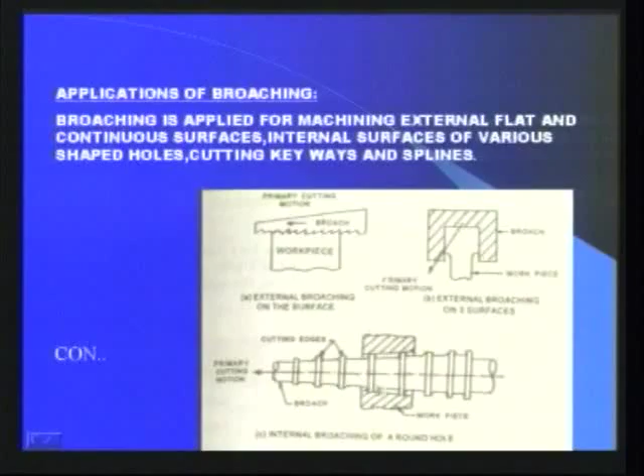These are some of the applications of broaching: it is surface broaching, it is external broaching of two surfaces, it is internal broaching of a round hole, it is broaching of keyway, it is internal broaching of splines.

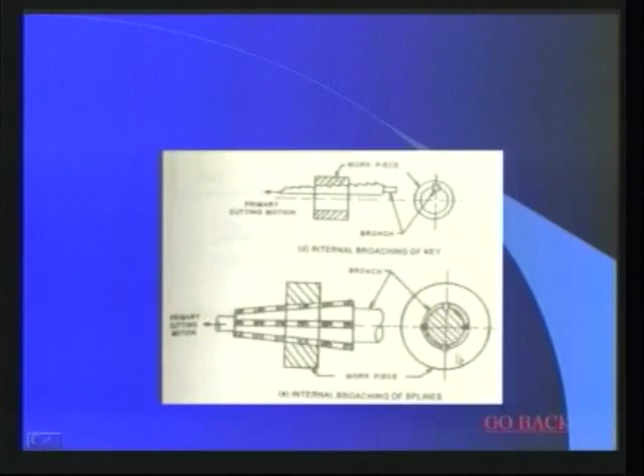Now we discuss the advantages of broaching machines and broaching operation compared with other machining processes. Broaching is faster than other machining operations as it is a one pass operation. So the rate of production is more, as it passes one time through the work for completing it.

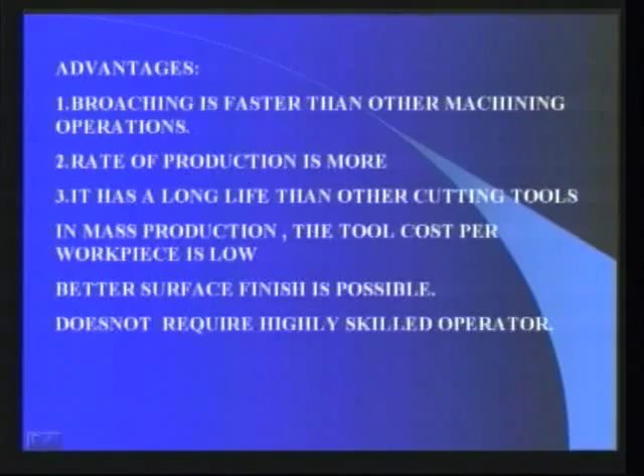It has a longer life than other cutting tools. In mass production, the tool cost per workpiece is low. Better surface finish is possible, and it does not require a highly skilled operator, as the feed and cutting speed are inbuilt in the tool.

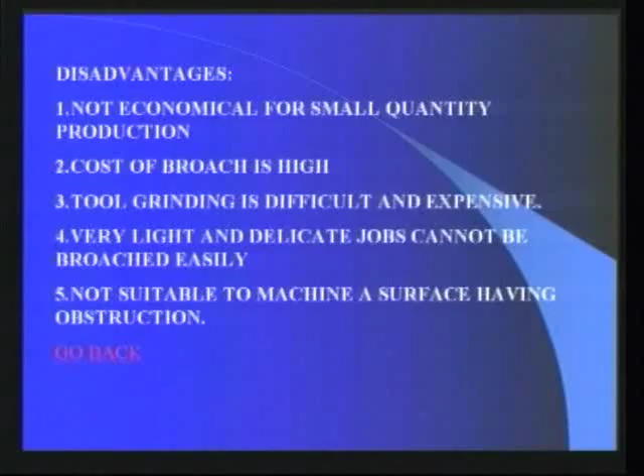The following are the disadvantages of broaching. It is not economical for small quantity production because the cost of the broach is high. Tool grinding is difficult and expensive because every tooth on the broach has its own dimensions. Very light and delicate jobs cannot be broached easily. It is not suitable to machine a surface having an obstruction.

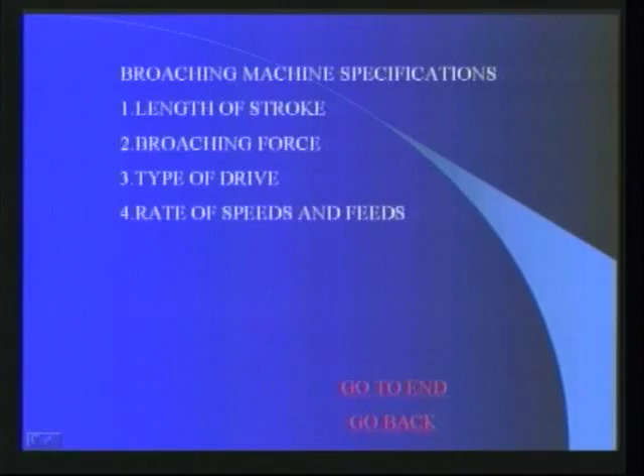Now we discuss the specifications of a broaching machine. To select a broaching machine, the following specifications need to be known: first, length of stroke; second, broaching force; type of drive; and rate of speeds and feeds.

So far, under the heading of broaching, we have discussed the definition of broaching and principle of broaching, and next we classified various broaching operations, and described various teeth on the broach tool, its nomenclature, and classification of various broaches. Next we discussed broaching materials and various types of broaching machines and their working principle, and next various applications like keyway cutting, surface broaching, spline broaching, and hole broaching, and we discussed advantages and disadvantages of broaching compared to other machining operations.

And finally, we have discussed what specifications are required to select a broaching machine.

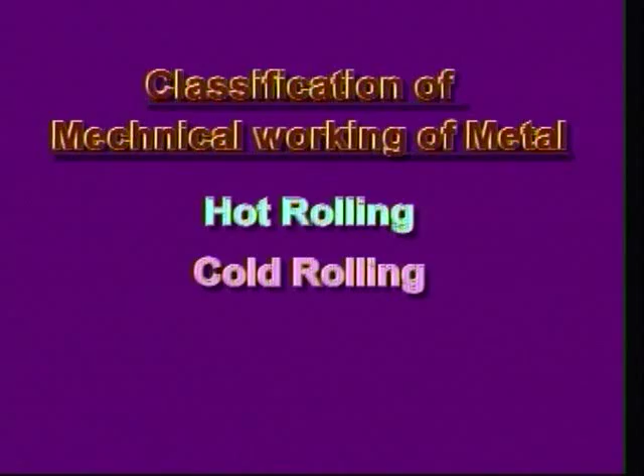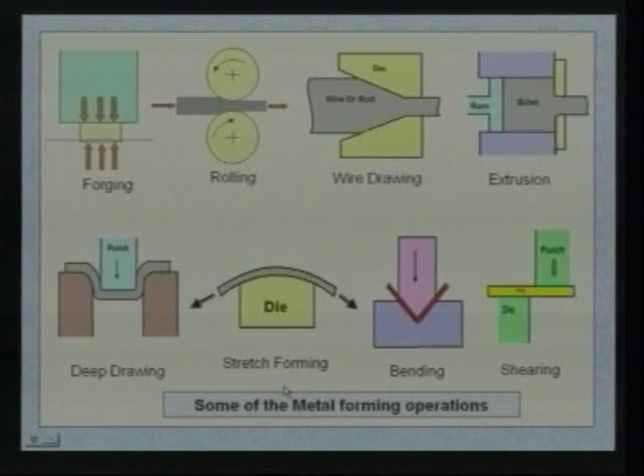Metal forming can be defined as the process in which desired size and shape are obtained through plastic deformation of materials, and the type of loading may be tensile, compressive, bending, shearing, or a combination of these.

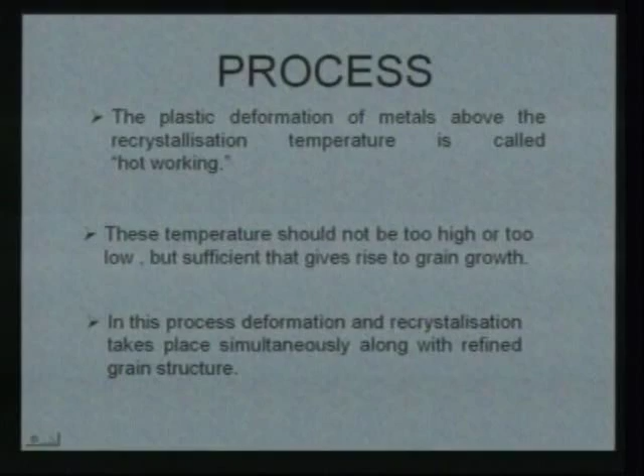Hot working: the plastic deformation of metal above recrystallization temperature is called hot working. The temperature is not too high or too low, but it is sufficient to give rise to new grain growth. In this process, the deformation and recrystallization take place simultaneously along with a refined uniform new grain structure.

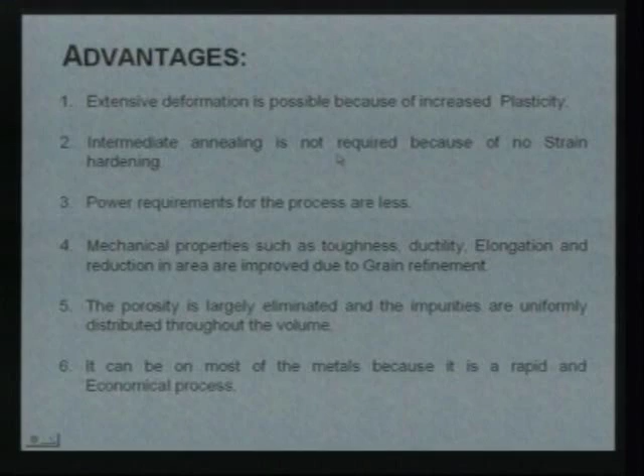Advantages and disadvantages. Advantages: in this process, deformation is extensively possible because of increased plasticity. Second, intermediate annealing is not required because of no strain hardening. Third, power requirement for the process is less. Fourth, mechanical properties such as toughness, ductility, elongation and reduction in area are improved due to grain refinement.

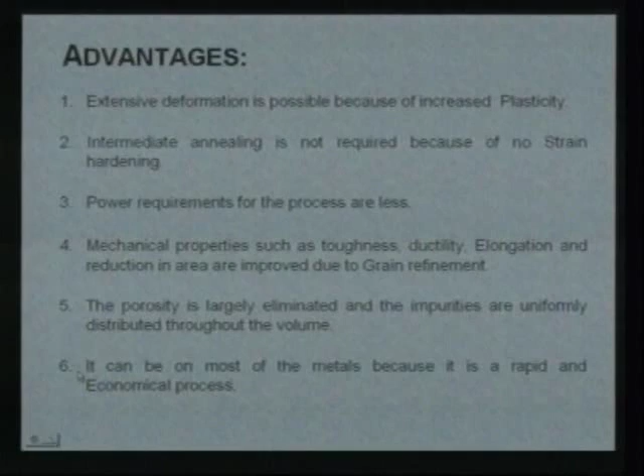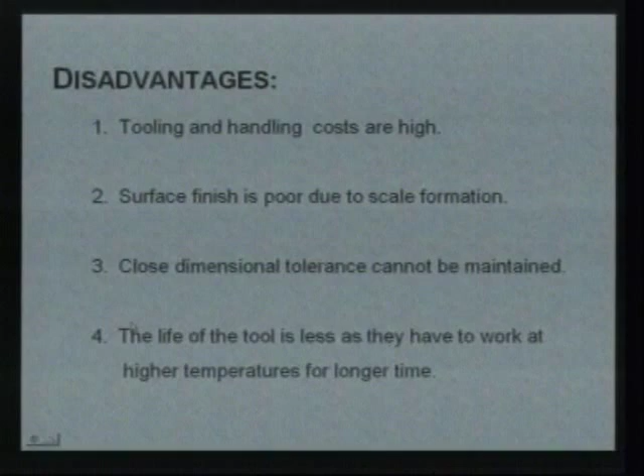Fifth, porosity is largely eliminated and impurities are distributed uniformly. Sixth, it can be used on most metals because it is a rapid and economical process. Disadvantages: tooling and handling costs are high. Second, surface finish is poor due to scale formation. Third, close dimensional tolerances cannot be maintained due to the heating of working conditions. Fourth, the life of the tool is less as they have to work at higher temperatures for longer time.

The process below recrystallization temperature is called cold working, and it is carried out at room temperature. Cold working should be followed by annealing to relieve internal stresses and to increase ductility, and at the same time the process increases yield strength, tensile strength and hardness.

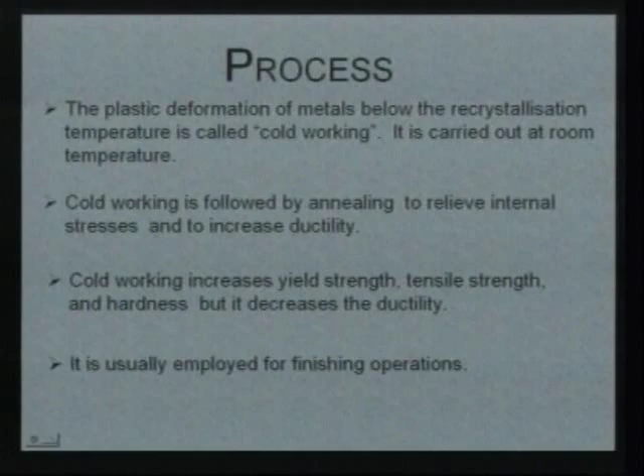Hot working processes are followed by cold working processes for a good surface finish. Advantages: surface finish is improved, and close tolerances can be maintained.

Friction increases the workload and thus more force and energy is required for the process. No surface oxidation or scaling results. Strength and hardness are increased.

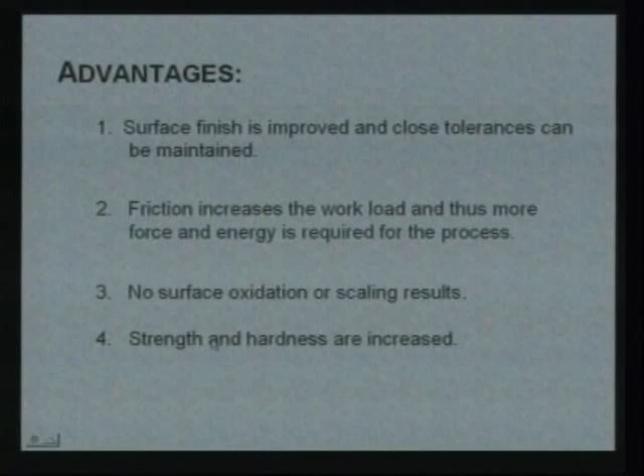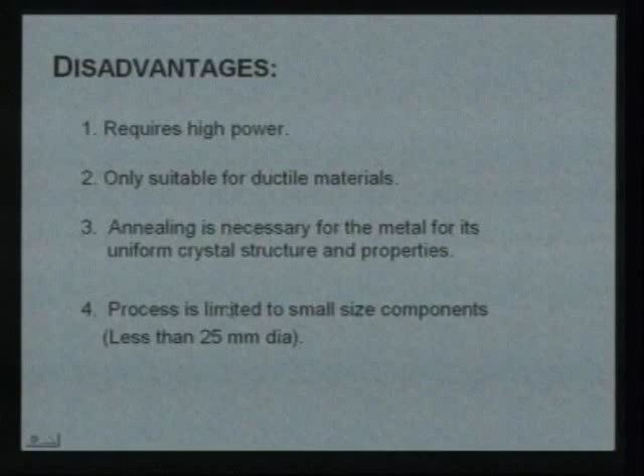Disadvantages: it requires high power. It is suitable for only ductile materials. Annealing is necessary for the metal for its uniform crystal structure and properties, and the process is limited to small size components, that is less than 25 mm diameter.

Hot working versus cold working. Now we will discuss the differences between hot working and cold working. The main difference is, in hot working the process is carried out above recrystallization temperature, and in cold working the process is carried out below recrystallization temperature.

Deformation is much more in hot working and deformation is less in cold working. Annealing is not required due to the new grain refinement, and in cold working annealing is required due to strain hardening.

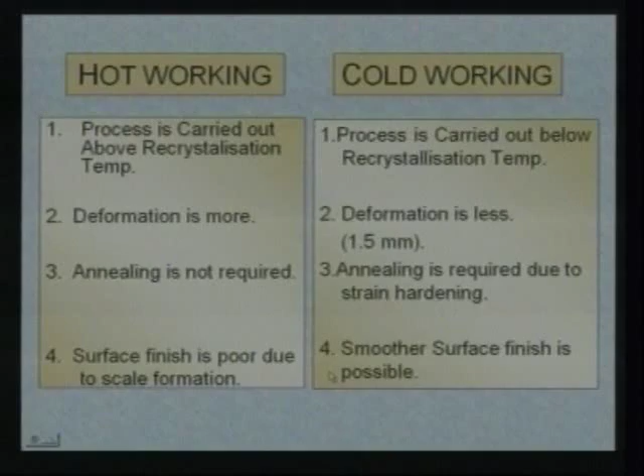Surface finish is poor in hot working due to the scale formation, while in cold working a smoother surface finish is possible. Mechanical properties are improved due to uniform grain refinement. Strength and hardness are increased and ductility is lowered.

Tooling cost is high in hot working, tooling cost is low in cold working. Power requirement for the process is less in hot working, power requirement for the process is more in cold working. Close dimensional tolerances cannot be maintained in hot working, while close dimensional tolerances can be maintained in cold working.

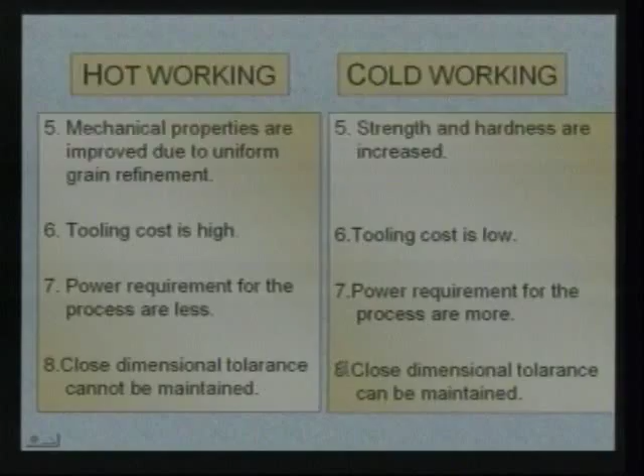Now we will discuss some of the hot working and cold working processes. Hot working: number 1 hot rolling, number 2 hot extrusion, number 3 hot forging, number 4 hot piercing, number 5 hot reeling, number 6 hot spinning, number 7 hot drawing.

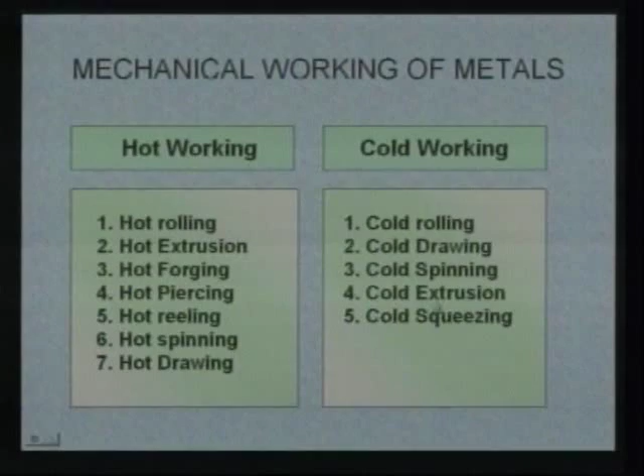In cold working: number 1 cold rolling, number 2 cold drawing, number 3 cold spinning, number 4 cold extrusion, number 5 cold squeezing.

Hot rolling. Hot rolling comes under the category of hot working process. It is the most efficient method of reducing cross sectional area of larger sections to smaller sections. It is mainly used in hot rolling mills. Material produced is used mainly in construction of structural work.

The plastic deformation of metal takes place as it passes through a pair of rolls rotating in opposite directions. The deformation is due to squeezing action of rolls. Its cross section is reduced with an increase in its length.

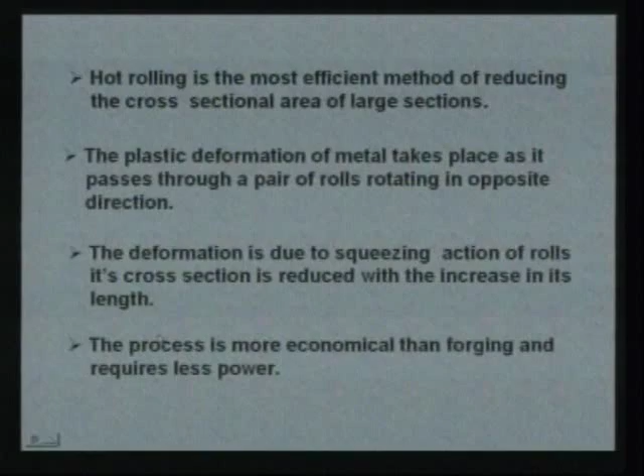The process is more economical than forging and requires less power. Rolls are made of cast iron or steel and are mounted on cast iron housing. The metal is processed several times in the rolling mills to get the required shape and size of the metal.

It is used to produce bars, plates, sheets and other structural sections like I-beam, channel section, L section, T section, etc., of different cross sections.

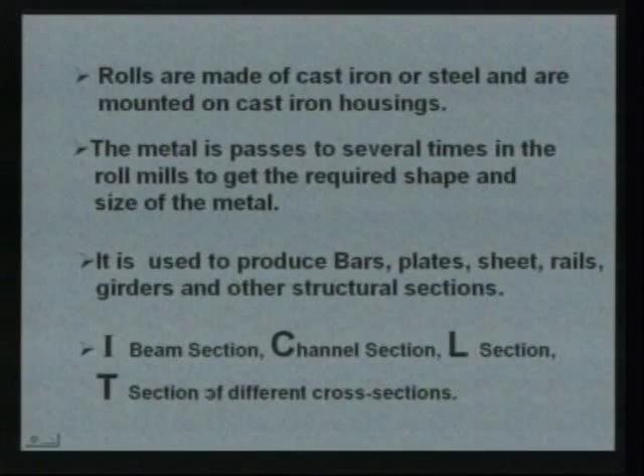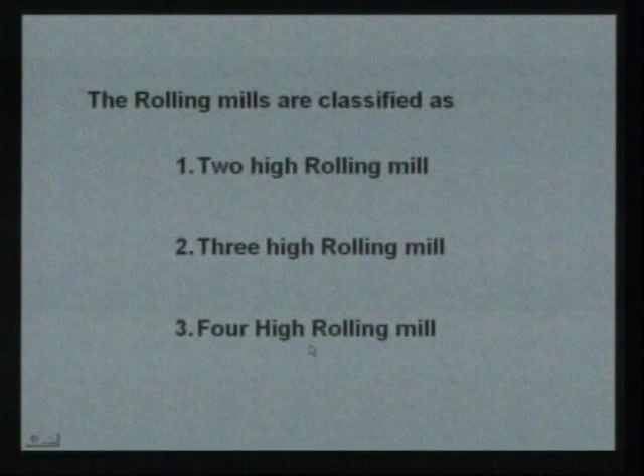The rolling mills are classified as: number 1, 2-high rolling mill, second 3-high rolling mill, and third 4-high rolling mill. In 2-high rolling mills, the figure shows 2 rolls rotating in opposite directions at the same speed, and these rolls are provided grooves of different cross sections.

The direction of flow of material is like this, or these rollers can also be reversed, and it takes several passes to reduce the cross section.

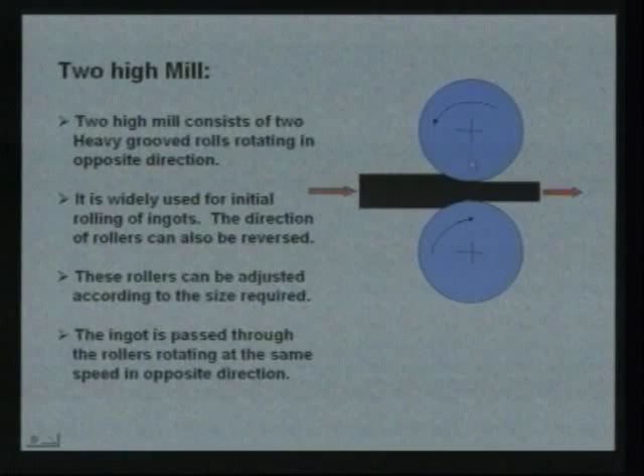The cross section is reduced like this, with the 2 rollers rotating in opposite directions. This roller is rotating in this direction and this roller is rotating in the opposite direction. Now the rod is fed towards the rollers.

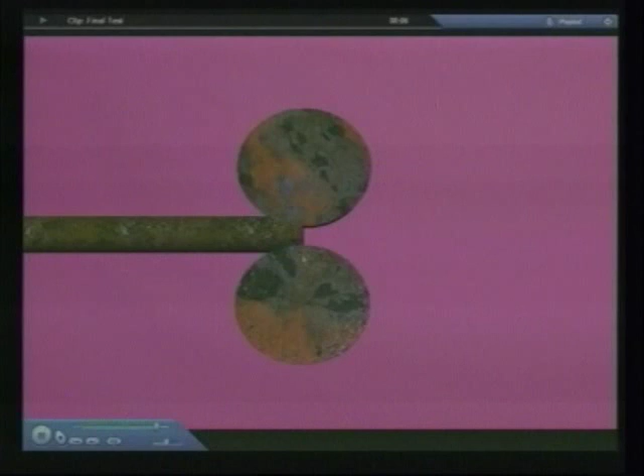As and when the diameter decreases, it squeezes and the reduced cross section rod comes out in the other direction. Now this is the original cross section and this is the reduced cross section of the same rod.

And next is 3-high mills. A 3-high mill consists of 3 rollers; with the help of these 3 rollers we can pass the material twice, as shown in the figure.

It is arranged one on the other, with the top roller and the bottom roller rotating in the same direction, and the middle roller rotating in the opposite direction. The material is rolled between the middle roller and the bottom roller in one direction, and between the top roller and middle roller in another direction.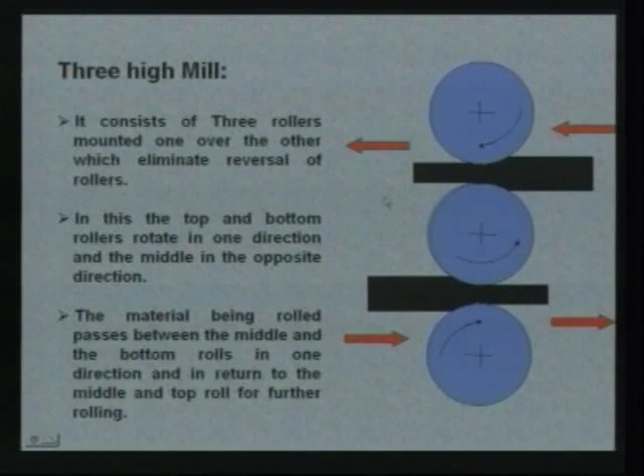And this is the 3-roll mill: this is the first roll, second roll, third roll. You see in this figure, these rollers are rotating in the same direction, this one and the top one, and the middle one is rotating in the opposite direction.

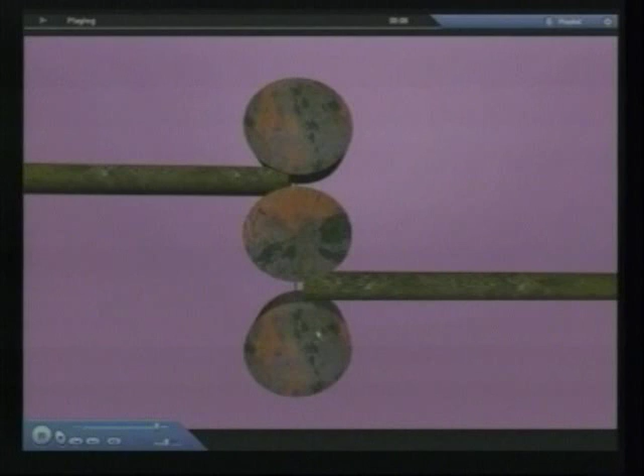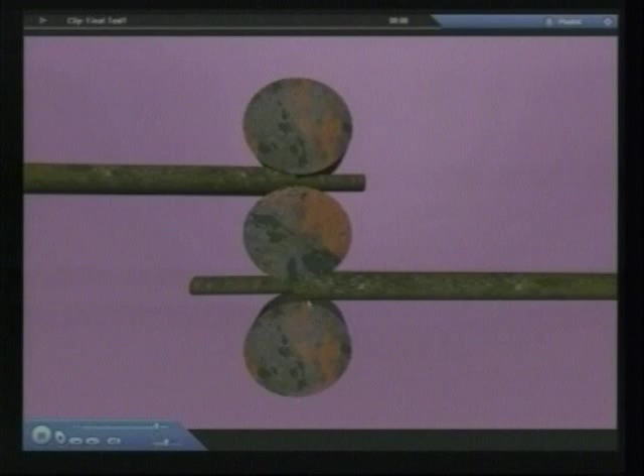Now the 2 rods are fed towards the 2 rollers at the same time, and the reduction in area, that is the reduced cross section, comes out at the end of the 2 rollers.

And next is 4 high mills. Due to the high elevated working temperatures, these rollers are going to be broken frequently. To avoid the rolling cost, we are provided small working rollers, that is C and D rollers, supported by 2 backup rollers, and this mill is mainly used to produce sheets of same cross sectional area.

That is, here also the direction is the same, and because of the backup working rollers, we can easily change the working rollers as and when it requires without changing the backup rollers.

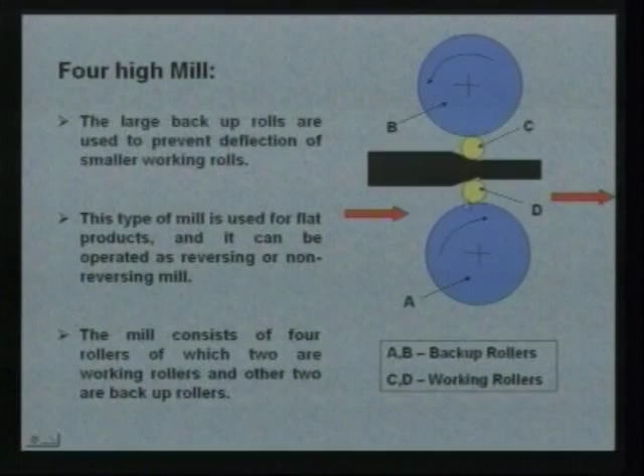That is, if you want a round section, the cross section is round, and if you want square, square. It generally took 10 passes for a big square billet of size 100 into 100 square of 1 meter length to become small round bars or square bars in regular rolling mills. These materials are mainly used as construction materials in building construction.

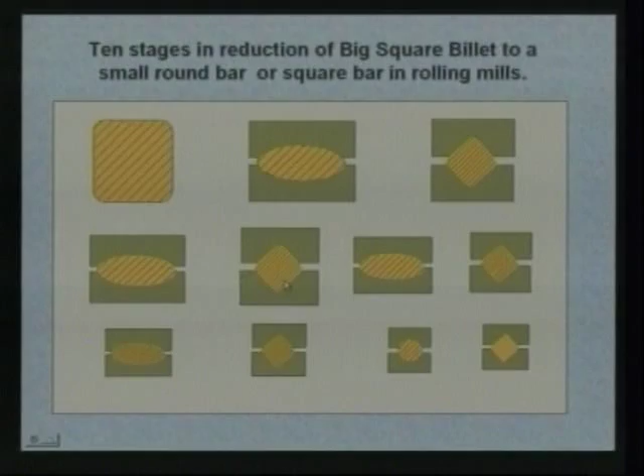Next is hot extrusion. Extrusion is the process by which a block of material is placed in a container for the reduction of its cross section by forcing it through a die orifice under high pressure. Hot extrusion is used to produce long lengths with the desired cross section, which is very difficult by any other process.

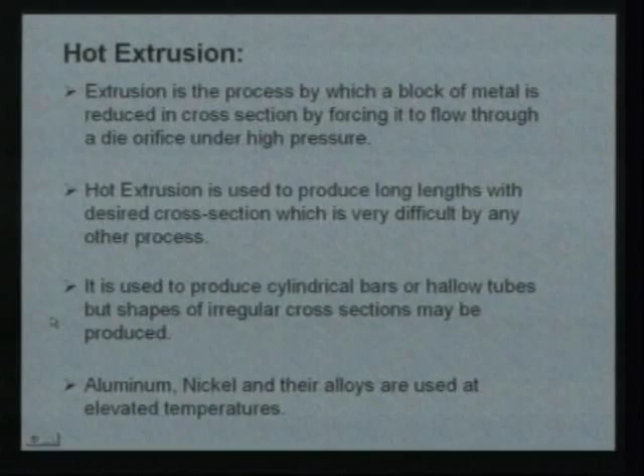It is used to produce cylindrical bars or hollow tubes, but shapes of irregular cross sections may also be produced. Aluminum, nickel and their alloys are used at elevated temperatures.

Advantages: number 1, a reduction ratio of around 40:1 can be achieved. Number 2, very complex shapes can be produced. Number 3, forces involved are compressive, so relatively brittle material can be extruded, which would not be possible with other methods. Number 4, excellent dimensional tolerances can be maintained along with a very high surface finish.

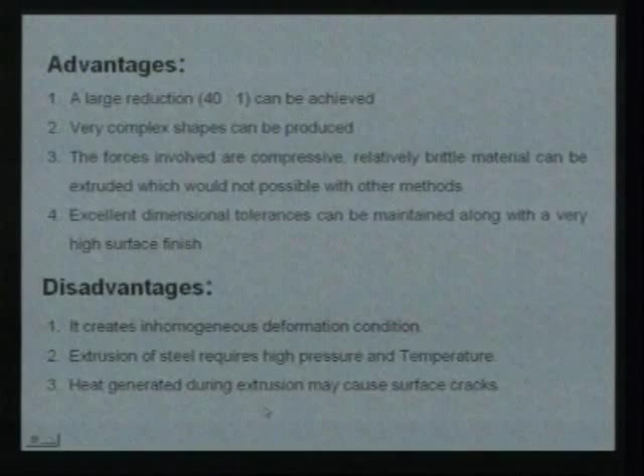Disadvantages: it creates inhomogeneous deformation conditions, that is, the reduction should be very large, due to that the deformation is inhomogeneous. Extrusion of steel requires high pressure and temperature. Heat generated during extrusion may cause surface cracks.

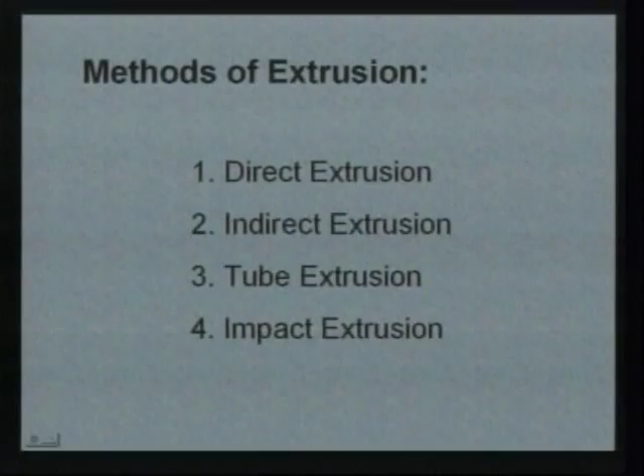Methods of extrusion: direct extrusion, indirect extrusion, tube extrusion, impact extrusion. Direct extrusion figure shows this: the heated billet is placed in a container. This is the container, with one end having the ram provided and the other end having the die of required shape.

First we are going to place the heated billet inside the container, and the ram is provided and pressed to a pressure, and the heated billet gives an extruded rod through a die, whatever the cross section it is.

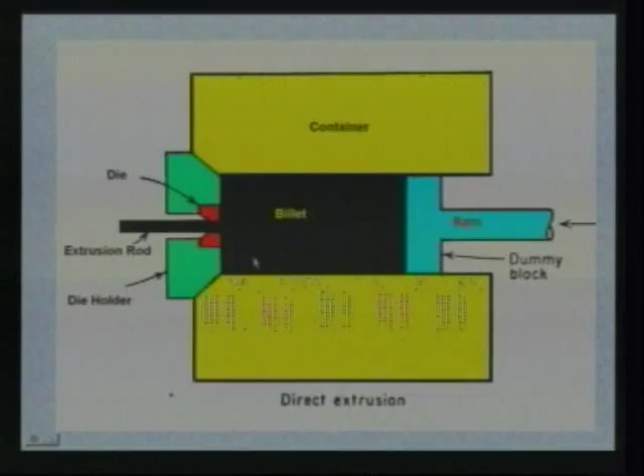So this is the direct extrusion, and the ram and the billet move in the same direction, and the die holder gives a rigid grip for the die because the billet is very heated, so friction may sometimes be caused. Now this is the container.

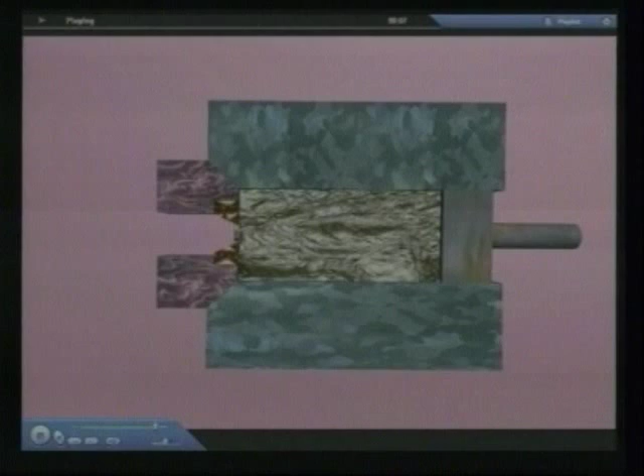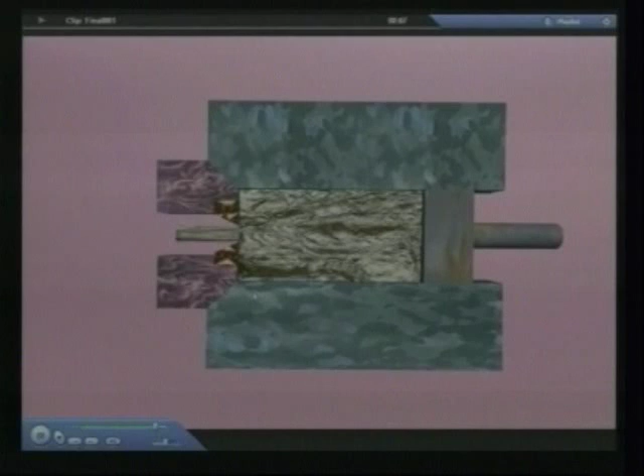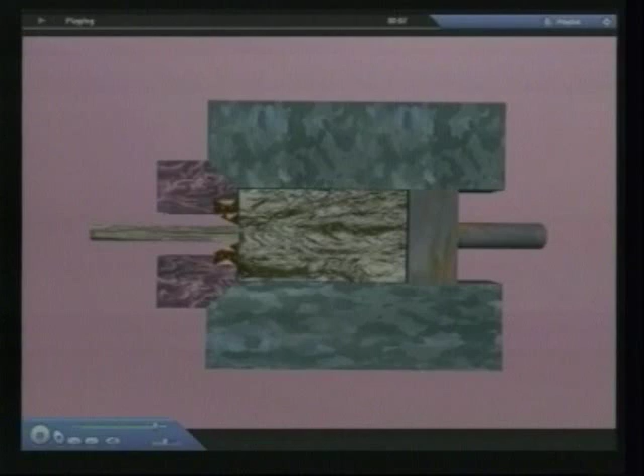This portion is the heated billet placed inside the container, and this is the die, and this is the die holder. Now the ram is pressed with high pressure and it touches the billet, and now the extruded rod portion is coming through the die as per the required cross section. This is the hardened die, and the extruded rod and ram are moving in the same direction.

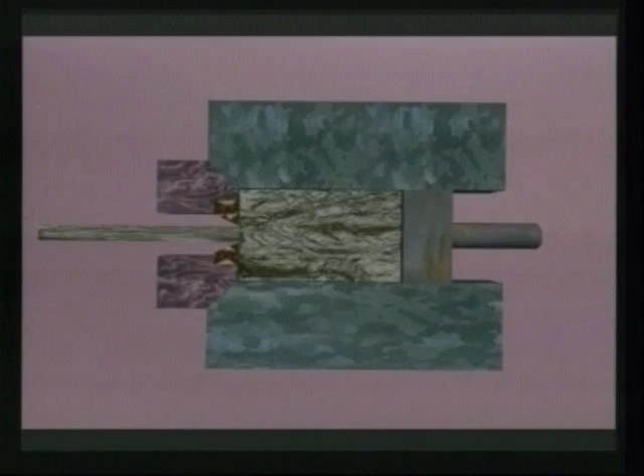In direct extrusion, during the operation the container and die are stationary and the heated billet moves relative to the container. This causes high frictional force, requiring the use of high ram pressure.

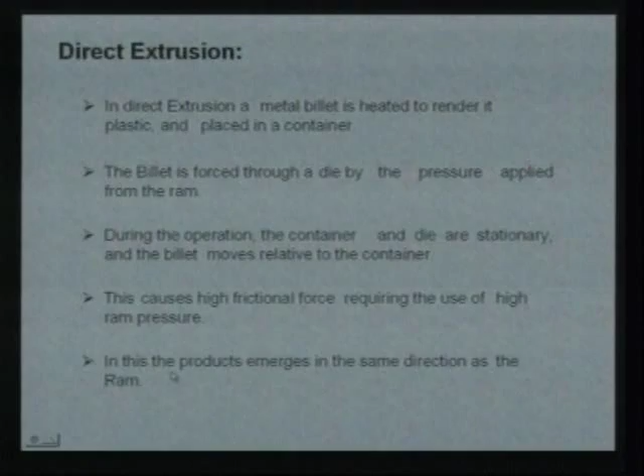Indirect extrusion is the same as direct extrusion, but here the container is closed at one end and the heated billet is placed inside the container. The ram is provided with a die and pressed towards the heated billet, and the extruded rod comes out in the opposite direction to the ram. Much lower pressure is required for indirect extrusion because the material is coming out inside the ram.

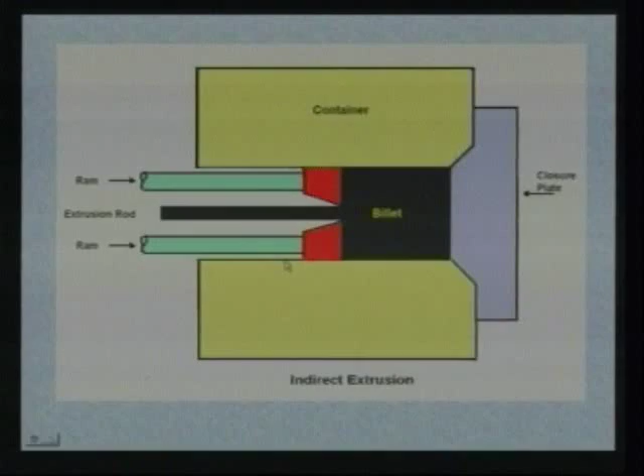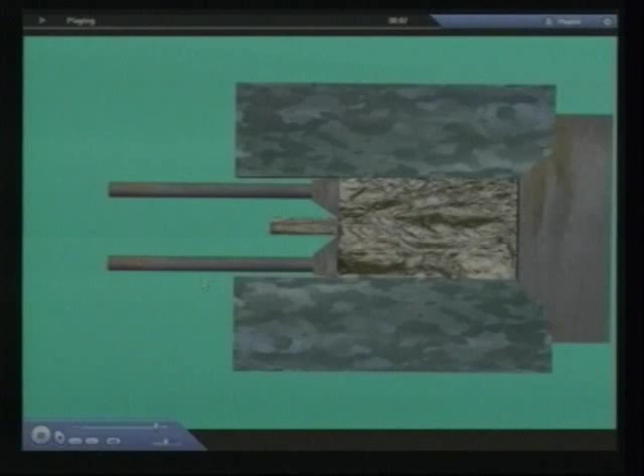Again, the container is closed with a plate, and this portion is the heated billet placed inside the container, and the ram presses the die towards the container. Then the extruded rod comes out in the opposite direction to where the ram moves. This portion is the extruded rod and again this is the die. The ram is placed on the die, and one disadvantage is that the extruded rod tends to bend due to not providing sufficient support during the operation.

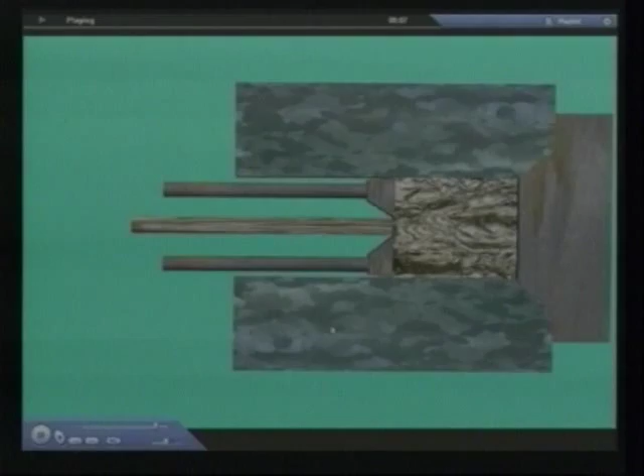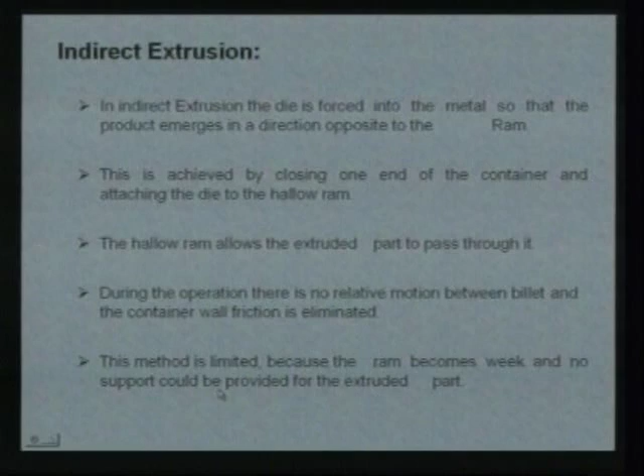During the operation there is no relative motion between the billet and the container wall, so friction is eliminated. This method is limited because the ram becomes weak and no support could be provided for the extruded part.

Next, tube extrusion. The tube extrusion figure shows the same setup: this is the container, the billet is placed inside, and the ram is provided with a mandrel which is pressed into the billet. In this way the mandrel moves so that the tube extrusion happens, as shown in the second figure.

This is the billet, the ram direction, and the mandrel is provided inside the ram so that tubes are manufactured in this process.

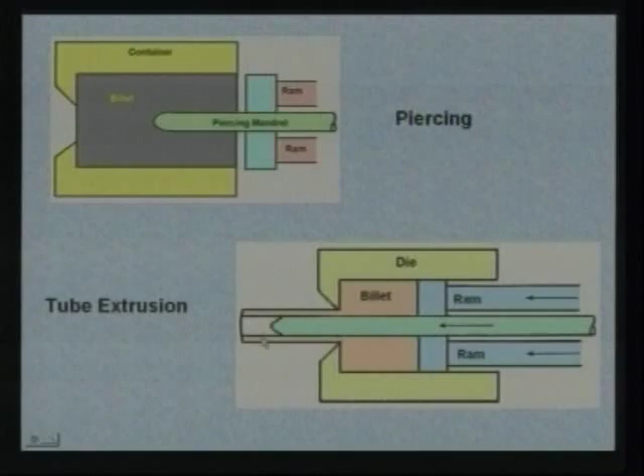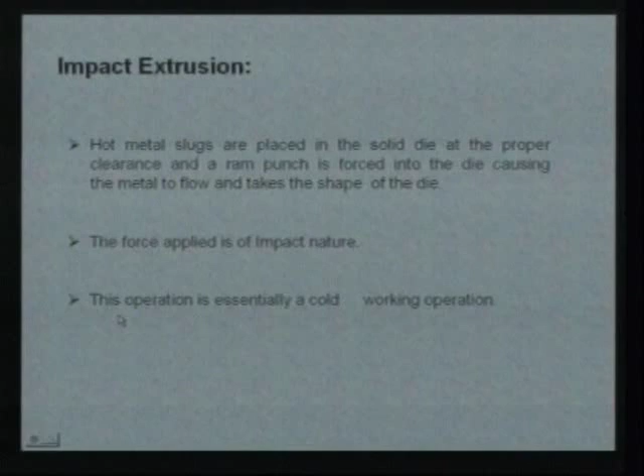Impact extrusion: hot metal slugs are placed in the solid die at a proper clearance, and a ram punch is forced into the die, causing the metal to flow and take the shape of the die. The force applied is of impact nature. This operation is essentially a cold working operation.